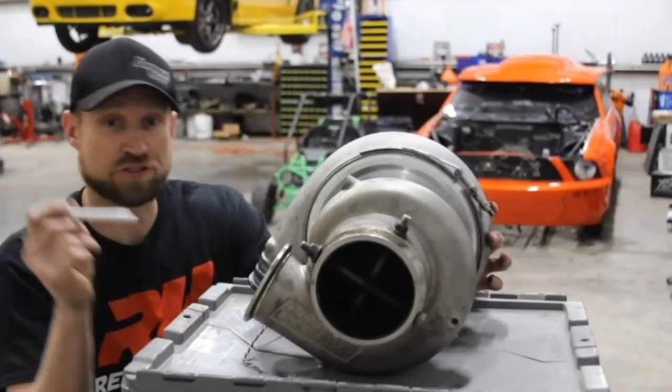Now, what it does is it uses engine exhaust, which goes in here. Can't really see it, hang on. There you go, see that little hole right there? It takes exhaust, goes in here, spins this beautiful wheel that's inside. Kind of hard to see, but there's a wheel in here that the exhaust spins. This exhaust is spinning this wheel 8 gazillion miles per hour. And what is that doing?

Well, this wheel is connected all the way through here. So as it's spinning this wheel, guess what? It's spinning the magic wheel, the magic wheel right here. Look, I'm going to spin it from the backside here. Look at that, see, I'm spinning it, spinning the front wheel too.

So what that's doing is, as it's spinning the wheel inside, it's taking air from in here and saying, hey, I want to make some horsepower. So all that air gets jammed right into this housing right here, and then it spits it out through this part right here. That right there is the baby maker. This is where it all goes down, okay? Because when it comes out of here, I'm talking thousands upon thousands of horsepower come out right here.

You better hold on, you better be strapped in, you better just be ready to go. Because when it's coming out of here, it's go time, it is time to party. If you're going to own a turbo, you got to be ready to party. Because if you ain't ready to party, then don't buy a turbo, go buy some nitrous.

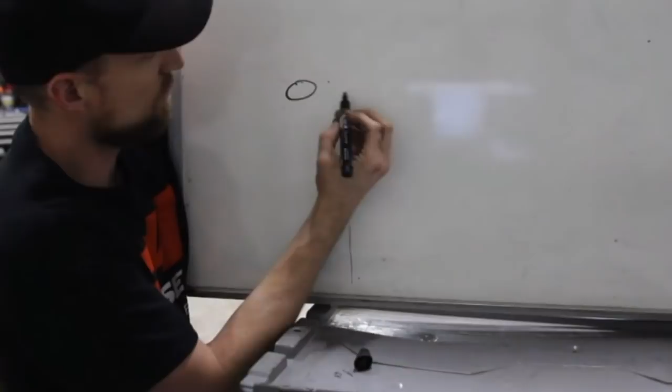So let's draw the turbo. There we go. There's one housing, kind of another housing. Then you've got this shaft going.

Uh-oh, oop, that doesn't look good. That looks very inappropriate, hang on. That looked borderline almost too graphic for YouTube. You know, some turbo guys have the big shafts, and some guys have the medium or small shaft. So for me, example, I'd be like, beep, like that. But that's a different topic altogether.

Got a turbo housing here, we'll just draw that a circle there, and then we've got another turbo housing here. We'll draw a circle there, and then we've got a shaft right there and a shaft. Uh-oh, that don't look good either. God bless, sorry guys. Here, then there's a shaft that goes through.

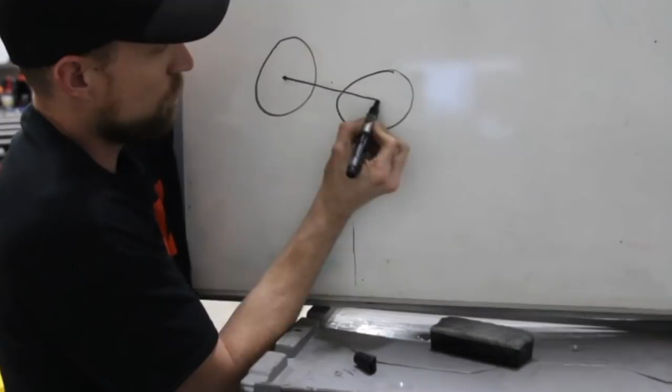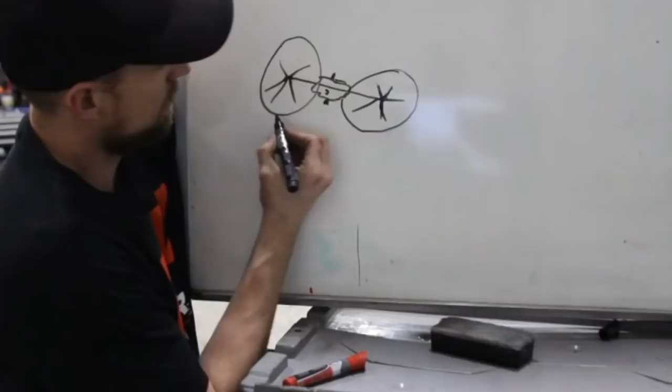And then you've got blades. Look at that, and you've got some blades back here too. And you've got a housing in here, with a little oil. That's a good-looking turbo, by the way. Got to draw some little inlets here, something like that. And then it's got another little piece right there.

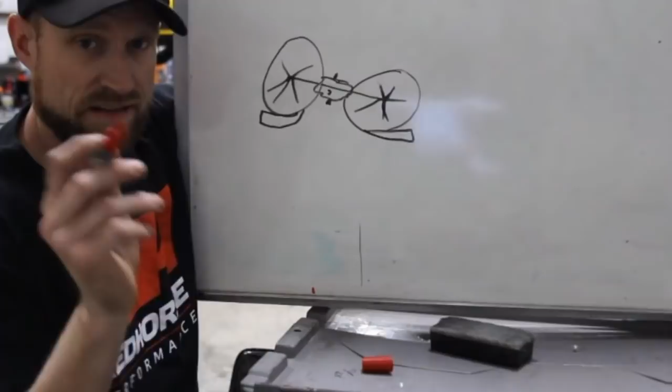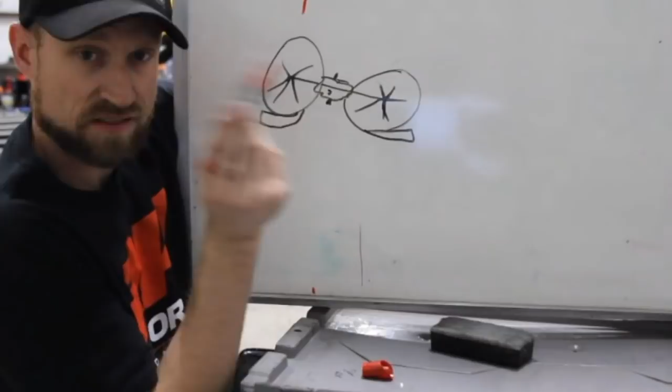Like I said earlier, you have the turbine housing. We'll draw this with a big T. This is what gets the exhaust. So you've got exhaust coming in there. Boom! Right there, exhaust comes in.

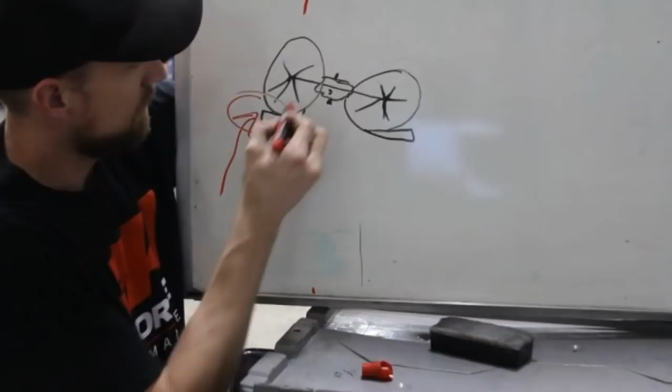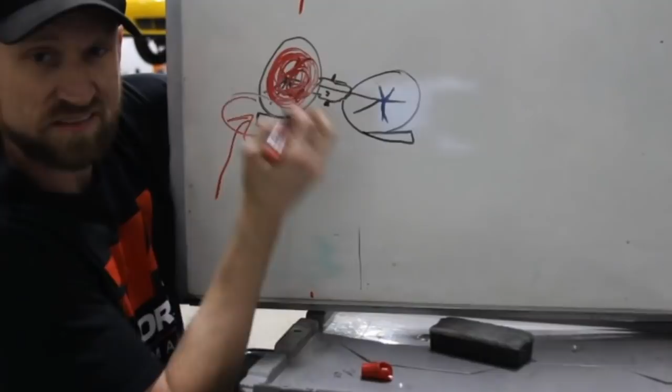And then it spins around there. Look at that, going 100 gazillion miles an hour. Which means it's spinning this little guy. See this shaft going through here? All this red, this exhaust, this hot stuff is spinning this shaft.

Now it's spinning this shaft, which means it's spinning this guy. So this is going 100 miles an hour in there too. Blue is for fresh air. Red's hot, red you're dead. Blue is fresh air, you can touch it, it's great for you, you love fresh air. We live on fresh air, we don't live on exhaust. Exhaust is bad, fresh air is good.

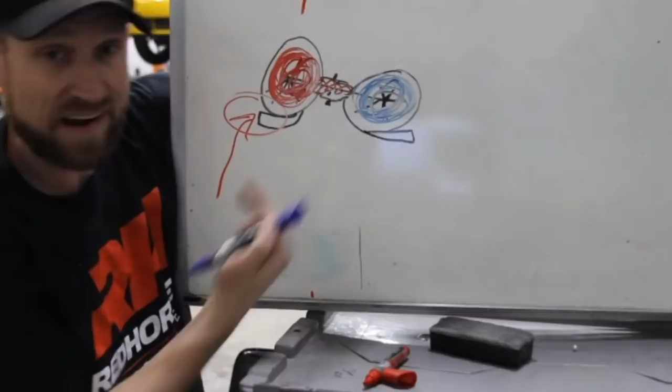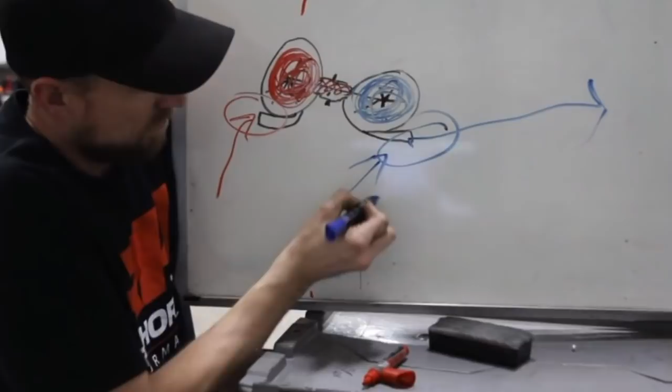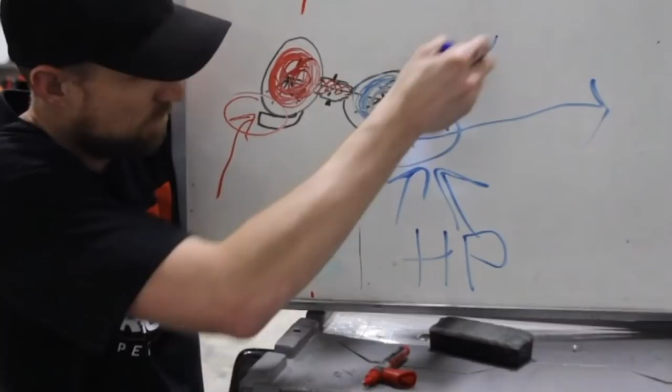Horsepower. Horsepower is all right here. So it's spinning this a gazillion miles an hour, spinning this one, which is pulling air inside the compressor housing and spitting it out. Bam! Right there, spits it out. So this right here is horsepower, you read that? Right there. Draw another arrow, a couple more. Just like that. Horsepower, this little guy right here.

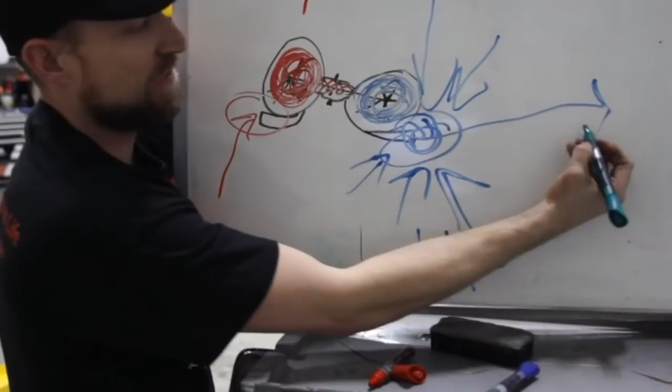So it spits that out, and then that sends all those horsepowers out here to your engine. We'll put E for engine, which when it goes to your engine, that makes you, as the driver, happy.

So in closing, what I'm really trying to say is, Mr. Turbo, you have changed so many lives in drag racing. Not just drag racing, in the world, period. You're innovative, you're full of excitement, and that's what the world really needs. I mean, look what you've done just with Street Outlaws racers in general. Let's look at Daddy Dave, for example. When I met Daddy Dave, he was 100% nitrous, never going to go turbo. Turbos suck, whatever - oh, see what I did there? Turbos suck, anyways.

We'll never go that path. Now, what is Daddy Dave today? That's right, he's got two of you on his car because he understands how much of a valued member of society you really are. Murder Nova, another great example - nitrous, blower, he was never going to go turbo back in the day. But look at him now, he's got two cars with turbos on them, 4 total turbos between two cars. He is love-stricken with turbos. Big Chief, same deal.